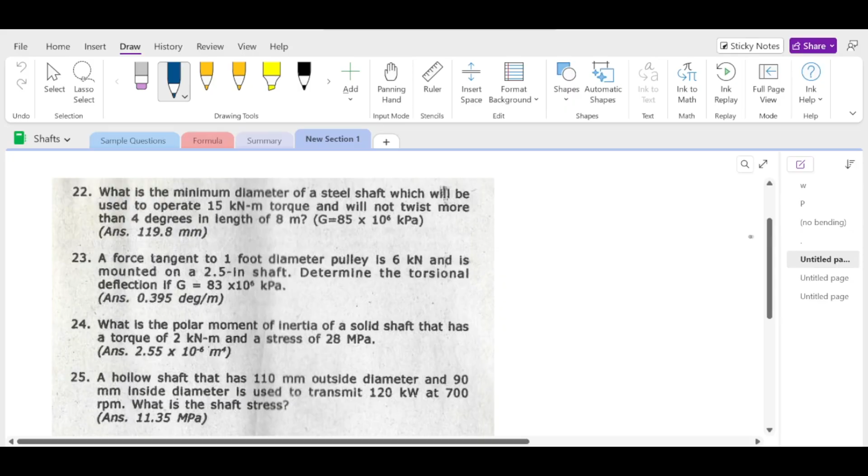So this will be second to the last of the group of problems we're preparing. So let us answer this. Numbers 22 to 27, okay, let's do a marathon here.

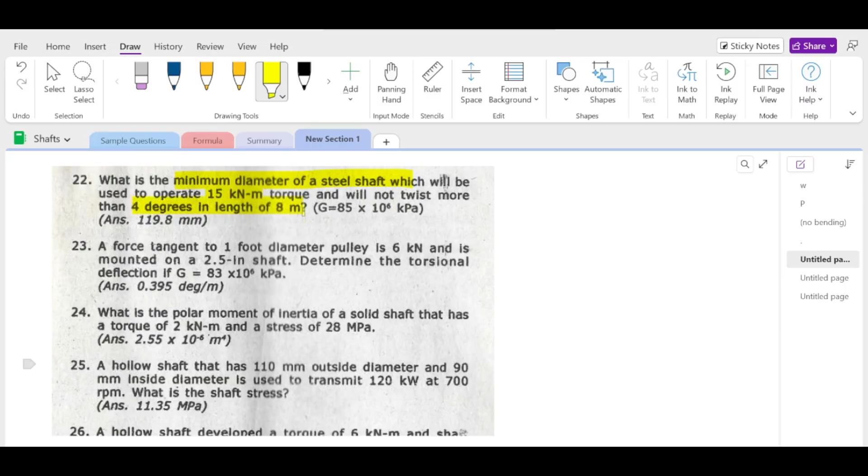For number 22, what is the minimum diameter of a steel shaft which will be used to operate 15 kilonewton meters of torque and will not twist more than 4 degrees in a length of 8 meters? So, basic again.

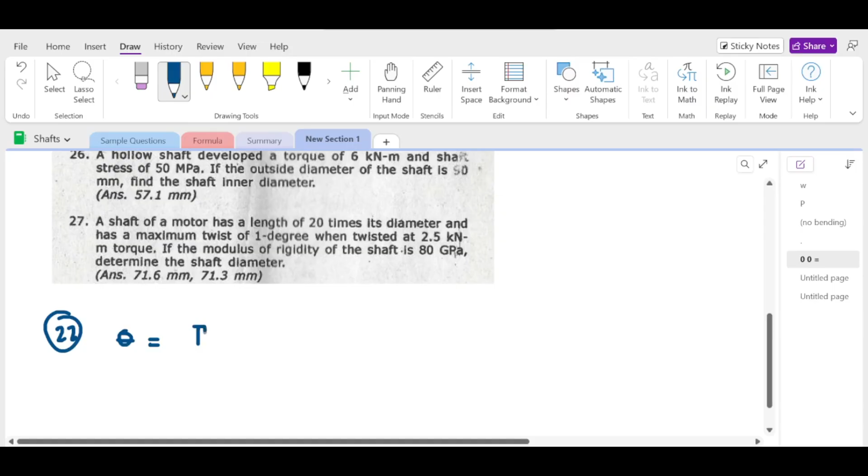Theta, right? So for number 22: Theta equal to T L over J G. Let's reform the equation first.

T L over pi over 32 D to the 4th, times G. You should always solve it like this. Okay, then simplify it further.

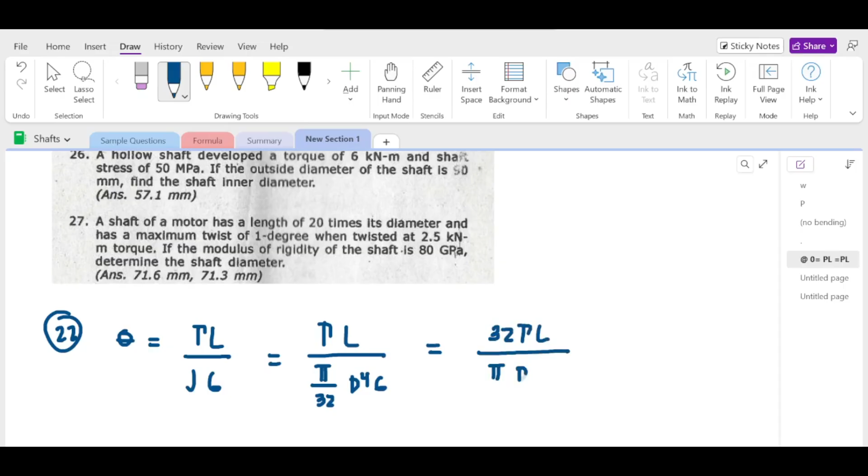Equals 32 T L over pi D to the 4th G. What we're looking for here is the minimum diameter. So diameter to the 4th equal to 32 T L over pi theta G. We can derive this from there.

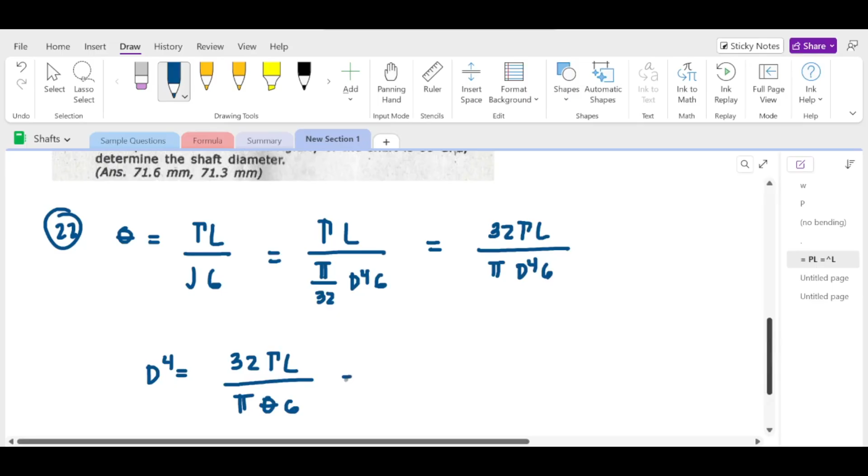So, 32, what will be the torque? 15 kilonewton meter. You have to multiply it with 1,000 squared to make it newton millimeter. So 15 times 1,000 squared. Why, sir? Because it's kilo and meter. Then this will become newton millimeter.

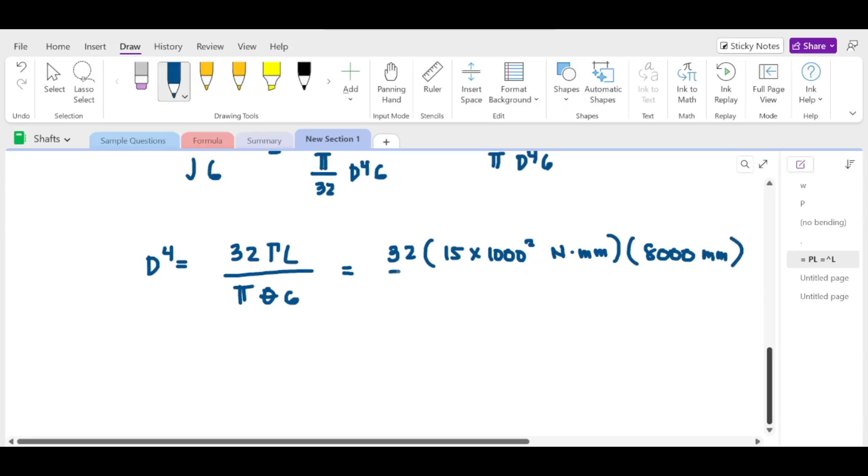So pi, I think that is 4 degrees. 4 degrees times pi over 180 degrees. And then our G is 85. Is that right, 85? Okay, 85 times 10 to the 6th kPa or 85 GPa.

85,000... 85 GPa. So 85,000 MPa or Newton per millimeter squared. Sir, what I need is diameter in millimeters. So 4th root, 4th root of all of it.

Pressing the calculator. Shift, 4th root here. 4 over, inside na tayo. So 32 times 15 times 8. So that's three 1,000's, times 1,000 raised to the 3rd power. Sir, why? I just extracted the 1,000 from the 8,000. Okay, so that is 4...

Shift pi times pi - wait, just two, don't square the pi. Over 180. And then multiply it with 85,000. So the answer is 119.799, or rather 119.8 millimeters. Basic again.

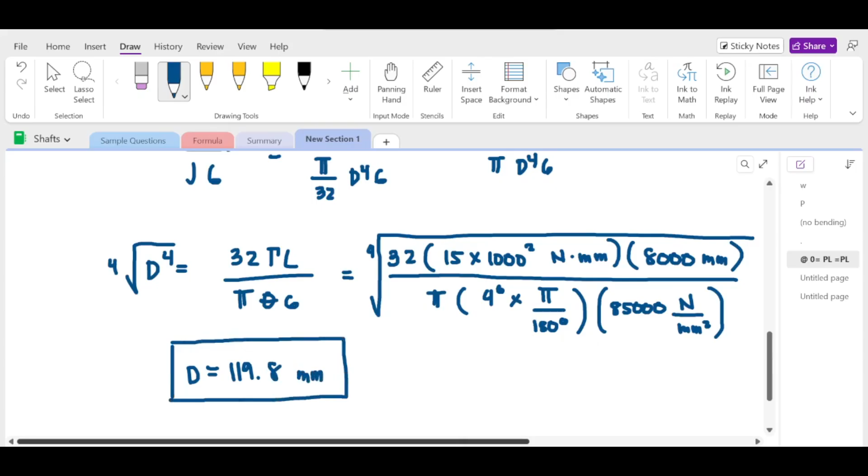Okay, so number 23. A force tangent to a 1 foot diameter pulley is 6 kilonewtons and is mounted on a 2.5-inch shaft. Determine the torsional deflection if...

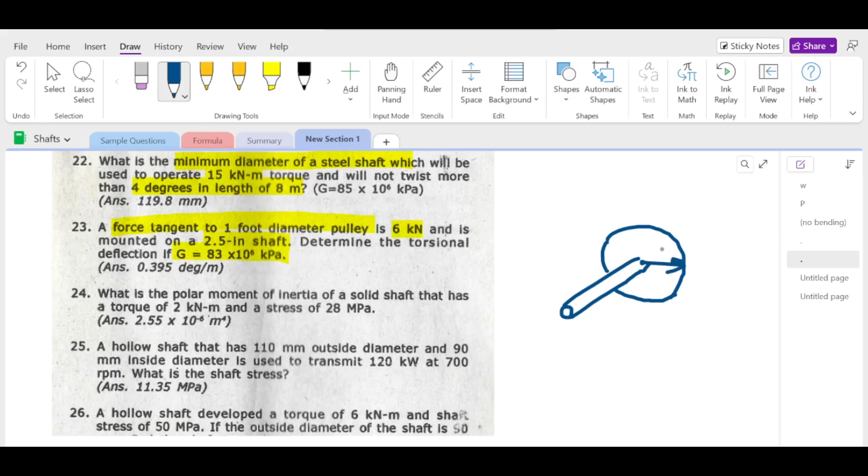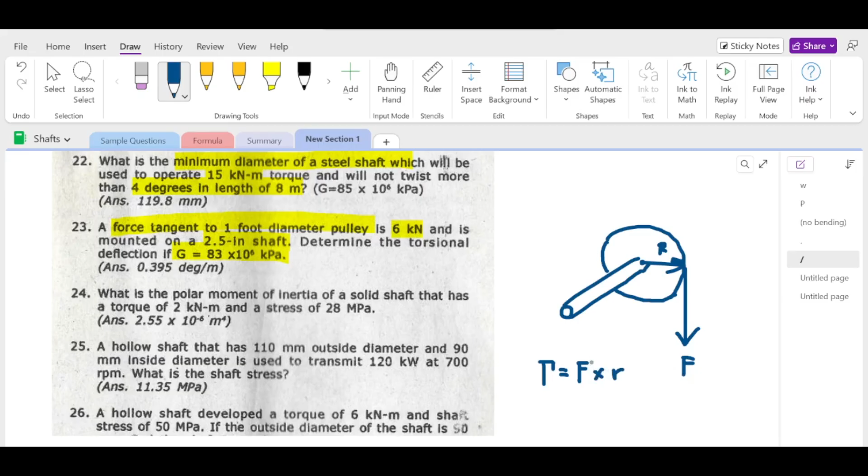This is the radius. The force tangent is this one. This is the force. Force times radius - you call that the torque. The force times radius, that is the torque. What we're looking for here is the torsional deflection.

So the torsional deflection, for number 22 - I mean number 23 now. Theta is equal to T L over J G. Our torque is force times the radius. That's the radius, but no radius was given directly. But our radius, we can use diameter over 2, times the length, over pi over 32 d to the 4th times G.

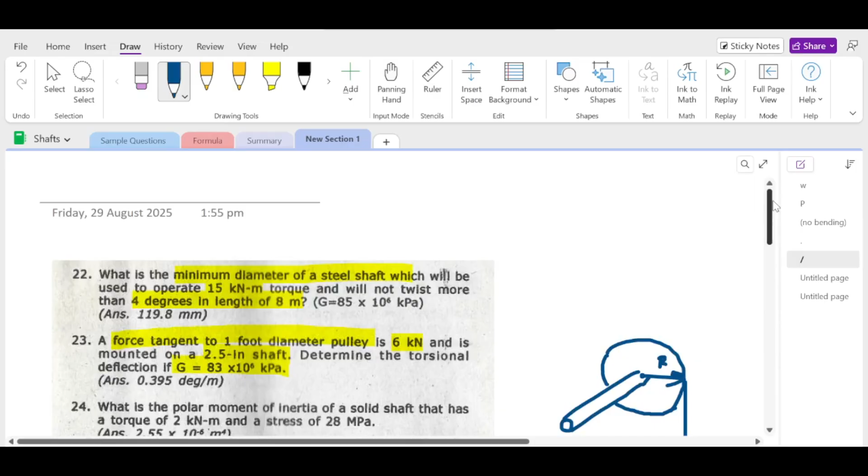So our F is 6 kilonewton, then 1 foot diameter. 6,000 Newton times 1 feet. 1 feet is 12 inches, right? Or 1 foot times 1 meter every 3.28 feet.

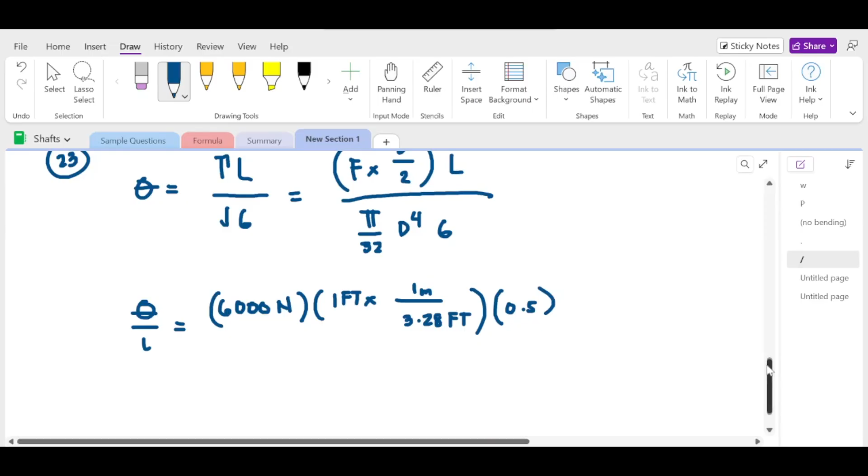2.5 inch - needs to be in millimeter. So 2.5 times 25.4 divide by 1 - now this is millimeter, then to the 4th. And then the G - what is our G here? 83... 83,000 Newton per millimeter squared.

Newton meter - I need it in millimeter. So I multiply this by 1,000 mm per 1 meter. Cancel all same units: Newton, feet, meter, millimeter here.

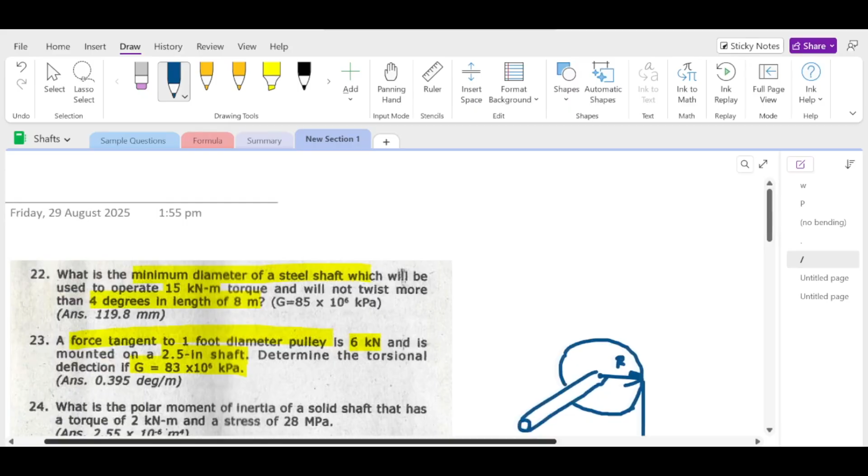0.3955 degree per meter. Basic again. So that is theta over L equal to 0.3955 degrees per meter. Okay, so that is for number 23.

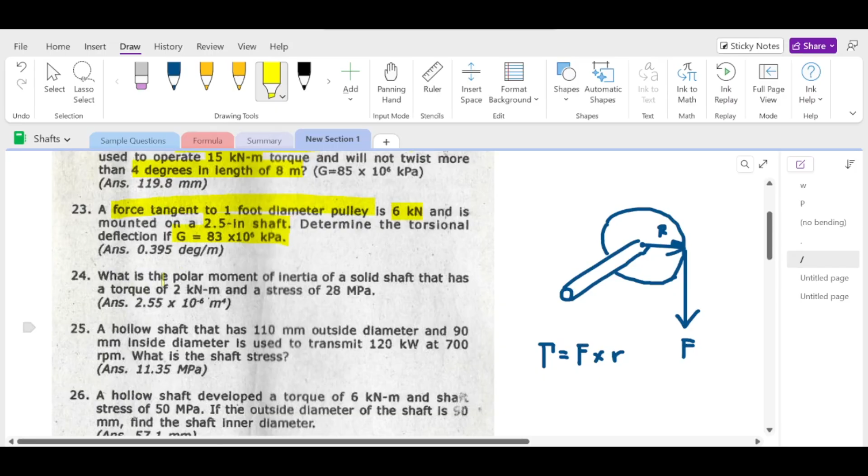Number 24, what is the polar moment? Polar moment of inertia of a solid shaft. You have a torque of 2 kilonewton meter and a stress of 28 megapascal. So I have a stress, then I have a torque. I need to find the diameter. What is asked in number 24 is J, which is pi over 32 d to the fourth. Do I have a diameter? No, they only gave torque and stress.

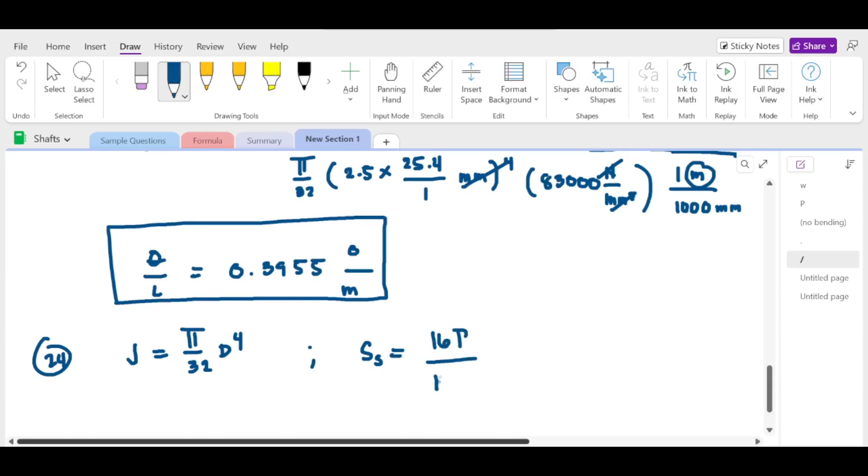So the stress is 16T over pi d cubed. So I need to find d cubed. D will be equal to cube root of 16T over pi ss. So I'll plug this into the value of J. J will be equal to pi over 32, so I can input it directly into the calculator. Our D is the cube root - I didn't simplify it, I'll just plug in the value as 16T over pi ss raised to the fourth power. As is, this is fine.

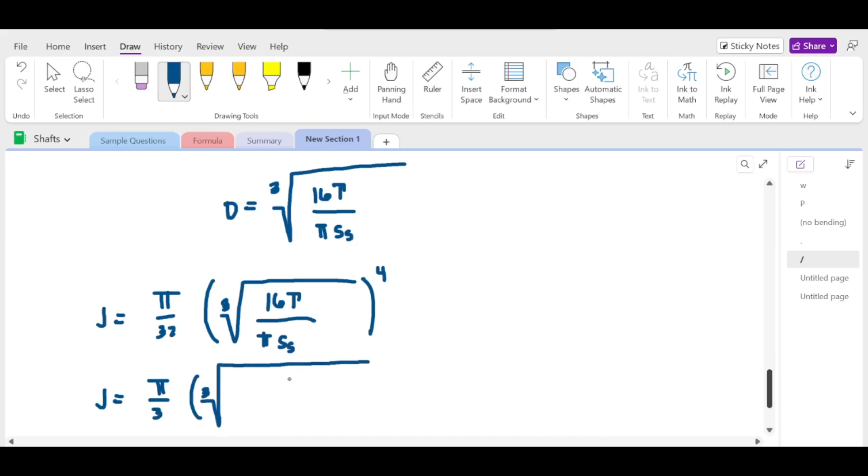So J is equal to pi over 32 times the cube root of 16 times the torque given to you. The torque is 2 kilonewton meter, so 2 times 1,000 squared. The shortcut I'm teaching you is 2 times 1,000 squared because it's in kilo, and it's in meters too. So this becomes Newton millimeter. Divide by pi. I think our SS is 28, yes, 28 MPa, so 28 Newton per millimeter squared.

Then raised to the fourth power. So J, what will be the value of J? Let's press it on the calculator. This is pi over 32. The unit of this will be millimeter to the fourth - yes, that's correct, millimeter to the fourth. So this results in millimeter. So this is shift third root I think.

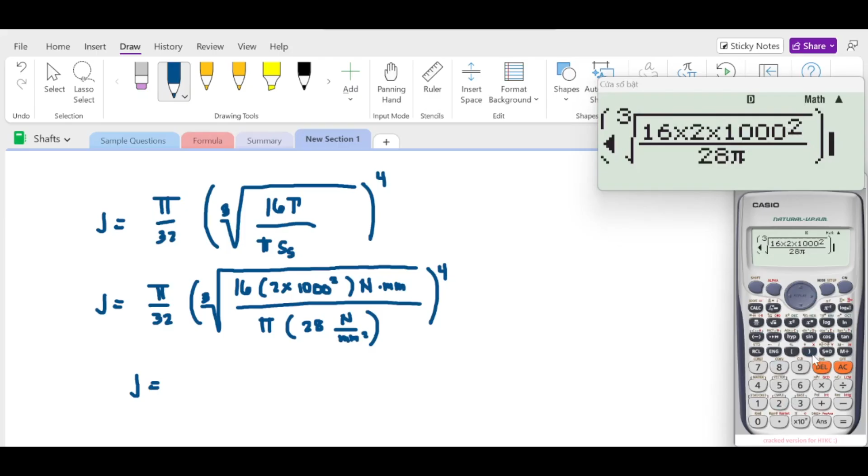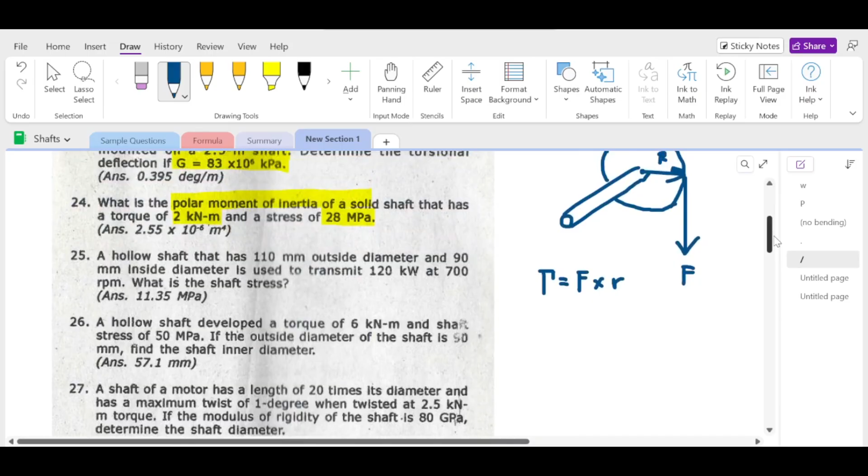So 16 times 2 times 1,000 squared, then 28 pi, then we raise it to the fourth power. So the answer is 2549505.736 millimeter to the fourth. That's correct. The answer is just in scientific notation - 2.55 times 10 raised to the negative 6 meter to the fourth.

It's in scientific notation now. So number 25: A hollow shaft has 110 mm outside diameter and 90 millimeter inside diameter. It is used to transmit 120 kilowatts at 700 RPM. What is the shaft stress? This is basic.

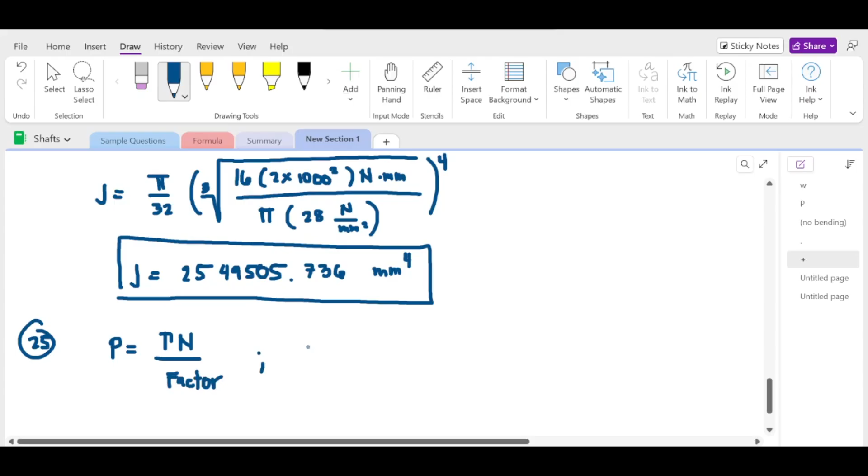Let's list the formulas we'll use. For number 25, the power given to you, that is Tn over factor. So what's asked of you is the stress on the hollow shaft. So the stress on the hollow shaft, that is 16T times diameter outside, divided by pi times diameter to the fourth minus diameter inside to the fourth.

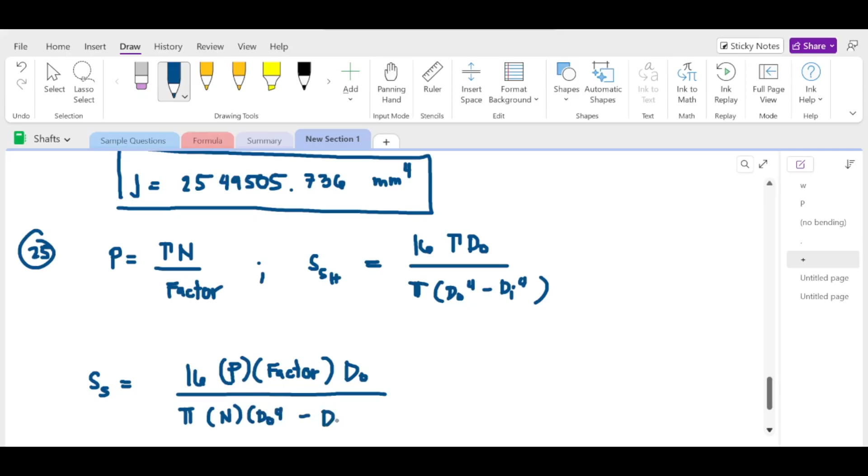Let's plug in the value of torque. So SS is equal to 16. Our torque is power times factor, then multiplied to DO, divided by pi, n, times DO to the fourth minus DI to the fourth. Let's plug in the values. So SS.

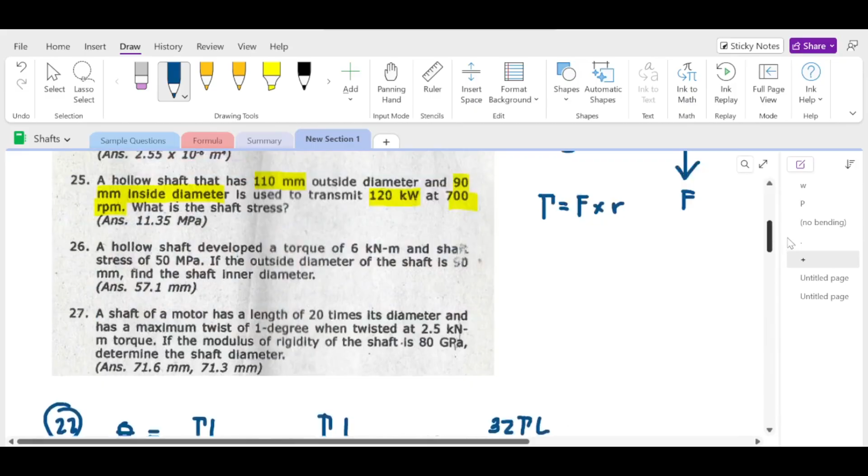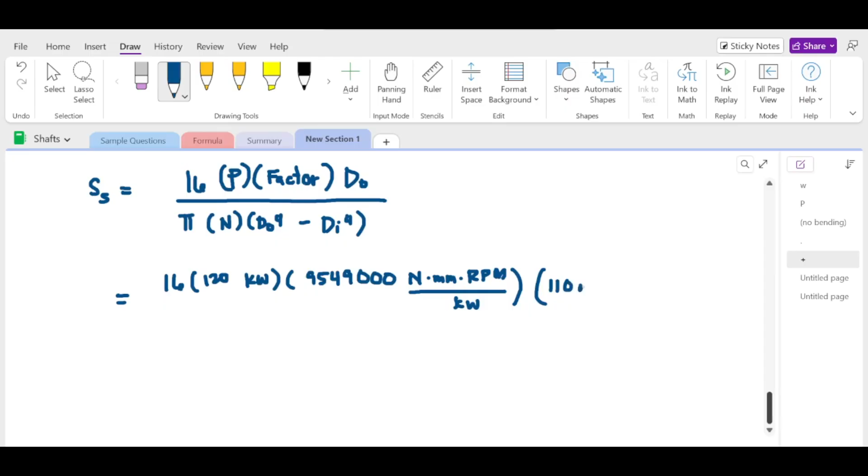So 16, what is the power given? The power is 120 at 700 RPM. 120 kilowatts. The factor is 9,549,000 Newton millimeter RPM per kilowatts. And then outside diameter is 110 mm. 120, how many RPM? 700. So, pi times 700 RPM.

And then inside the bracket: 110 to the fourth minus 90 to the fourth. The unit is mm to the fourth. So for stress, cancel all same units - kilowatt with kilowatt, RPM with RPM, millimeter with millimeter, millimeter squared - squared here. So it becomes Newton per millimeter squared or MPa.

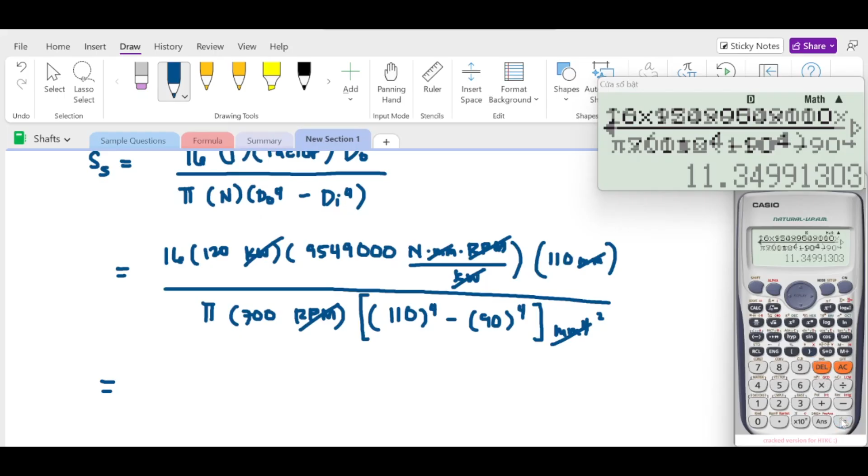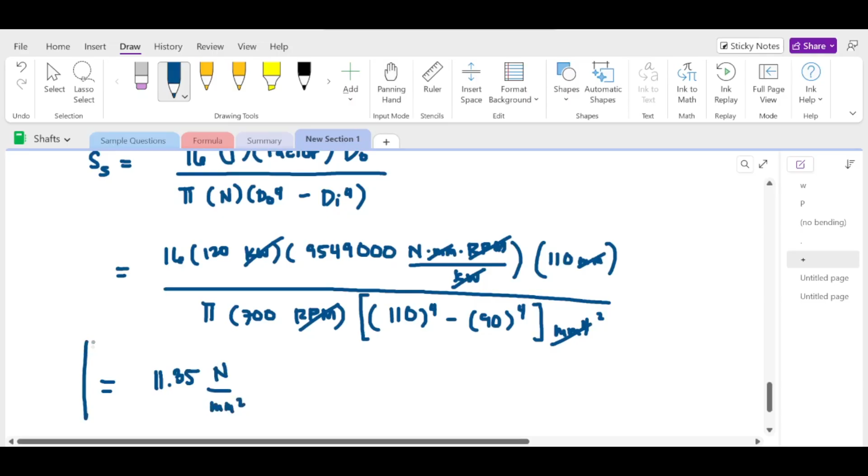So that is 16 times 120 times 9,549,000 times 110, divided by 700 pi times 110 raised to the fourth power minus 90 raised to the fourth power. So the answer is 11.35 MPa, Newton per millimeter squared. Let's check if that is correct for number 25.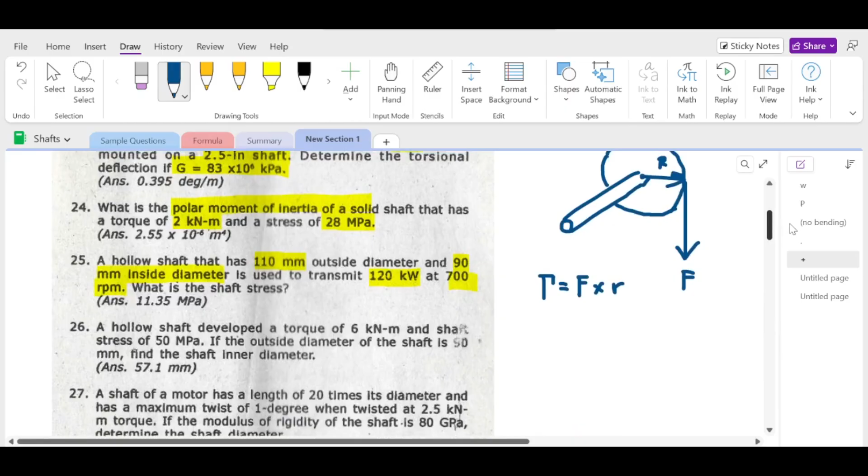Problem 26: A hollow shaft develops a torque of 6 kN-m and a shaft stress of 50 MPa. If the outside diameter of the shaft is... I don't know if this is 90, find the shaft inner diameter.

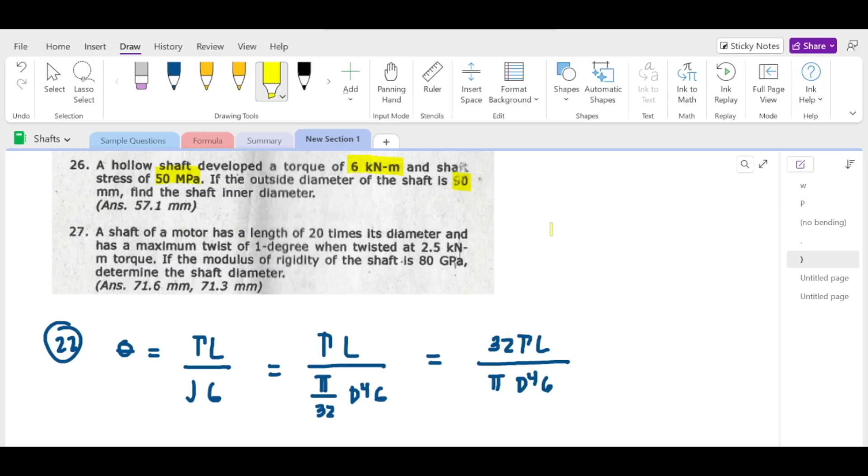I think this is 90. Let's just assume it's 90 - it's unclear. Maybe the inside is bigger. Let's assume this is 90. I'm not sure if this is 90 or 70 - it could be 70, 90, or 80. But let's just look at it. What we're solving for here is the inner diameter.

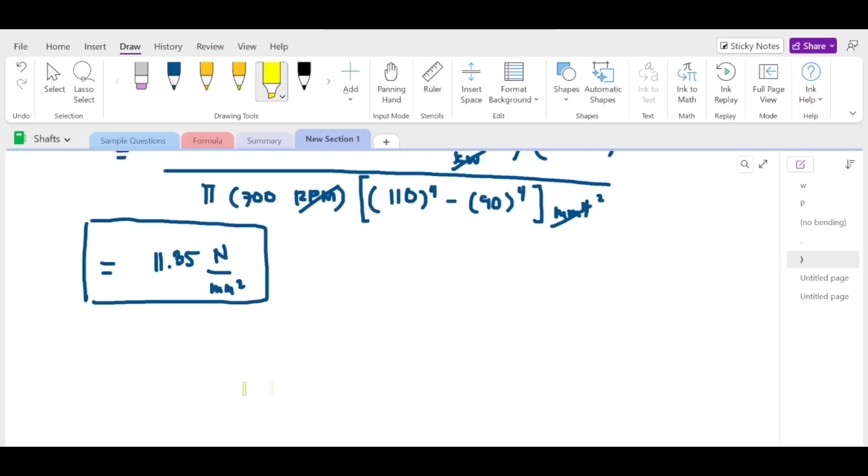Let's repeat the process. What's given to you is torque, for number 26. So the stress formula for a hollow shaft is SS = 16T·DO / [pi(DO^4 - DI^4)].

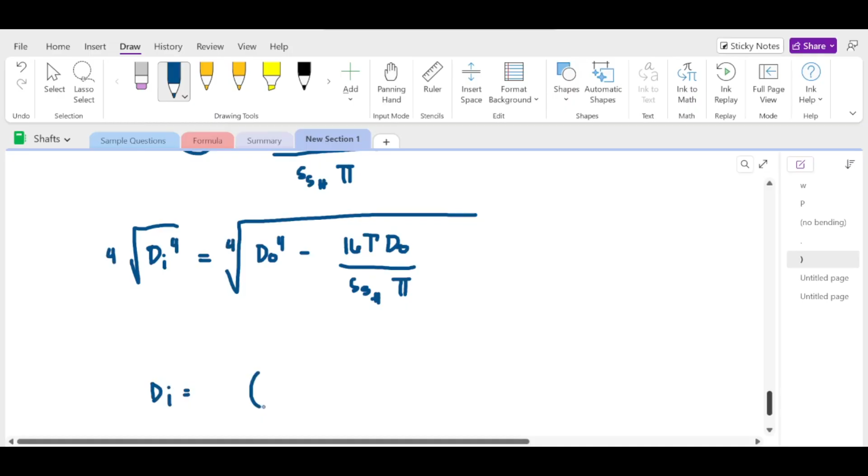Let's assume 90 for the outside diameter, with 6 kN·meter torque and 50 MPa stress. So 90 mm to the fourth minus 16 times 6 kN·meter, so 6 times 1,000 squared Newton-millimeter.

That's standard procedure already. Times outside diameter of 90 mm. Divide by stress - what is the stress? 50 MPa, so 50 Newton per millimeter squared, times pi.

So take the fourth root of this whole thing. Let's check if we've taken the fourth root correctly here. Cancel all same units: Newton combines, millimeter squared, millimeter cubed times millimeter, that's millimeter to the fourth power. And then the fourth root of millimeter to the fourth is millimeter.

Okay, so the answer is - these questions are basic. That is 90 raised to the fourth power minus 16 times 6 times 1,000 squared, times 90, divide by

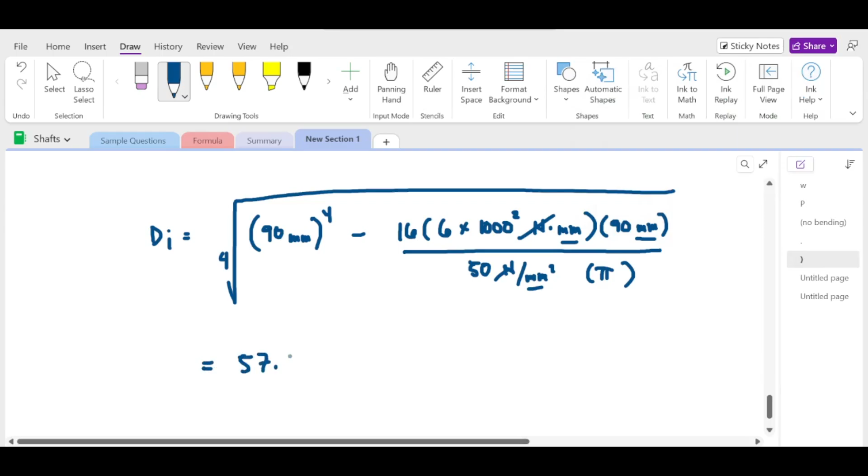50 pi. So the answer is 57.07 mm. This is very basic - the questions here are very basic.

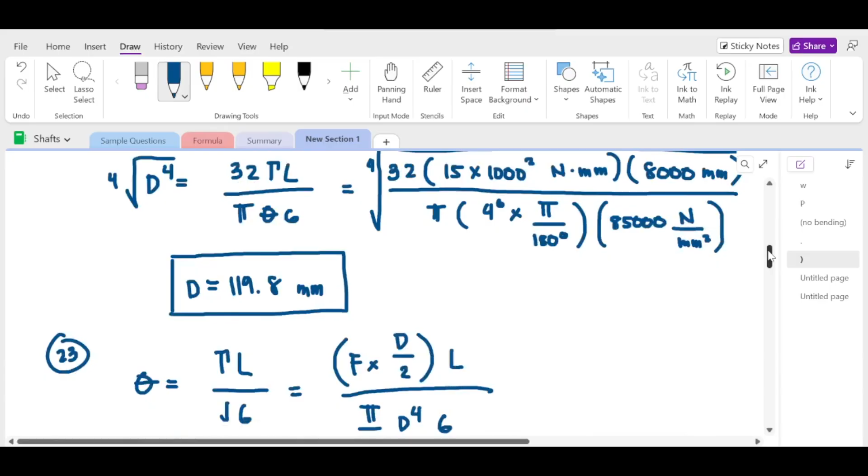For shafting, number 26. And for the last problem, number 27: a shaft has a length of 20 times its diameter. So it says the length is 20 times the diameter. What else? And has a maximum twist of 1 degree when twisted at 2.5 kN-meter torque. If the modulus of rigidity is 80 GPa - basic - find the shaft diameter.

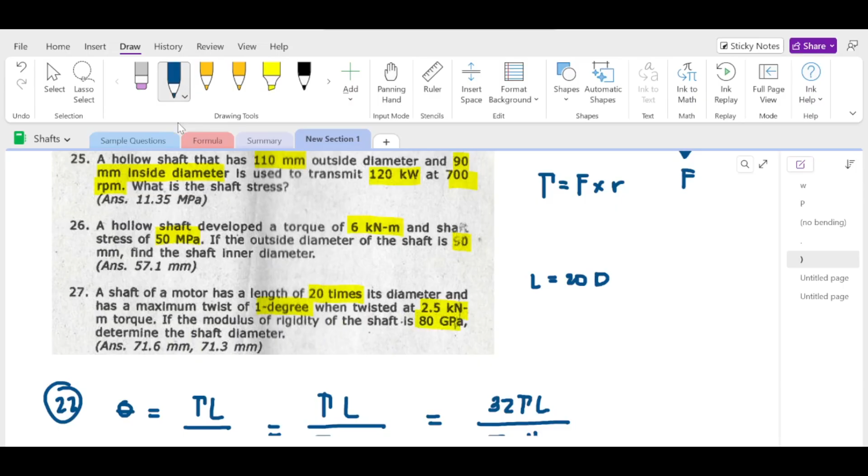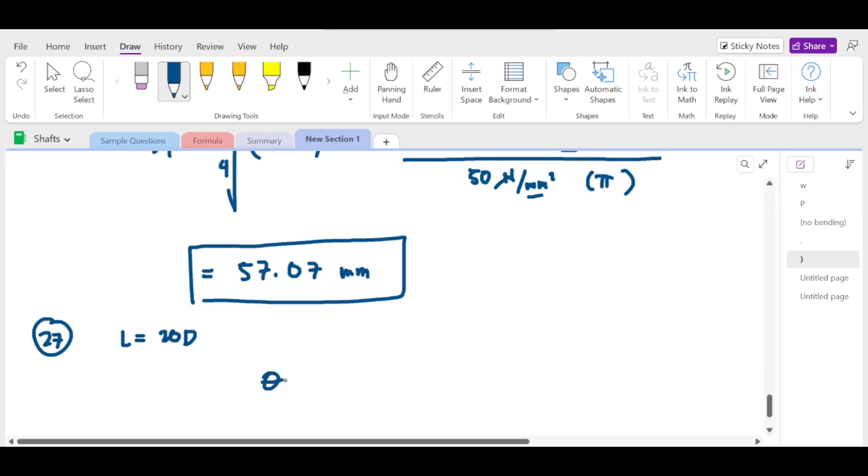For our answer, number 27, the condition is that the length is 20 times the diameter. So theta equals TL over JG. TL over JG - that's TL over pi over 32.

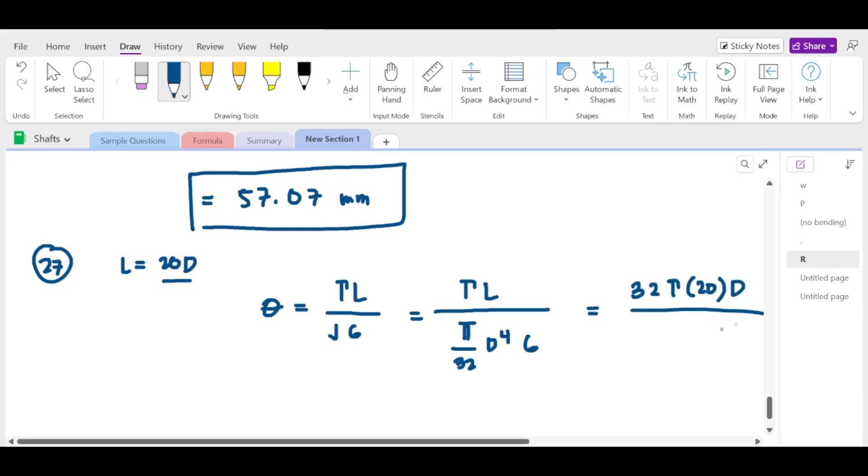Let's organize the writing so it's easier to understand. So pi over 32, d to the fourth, G. Simplify it further: 32T, my L is 20d, times 20 and d over pi, d to the fourth, G.

The D's will cancel, right? It becomes cubed. So theta will equal 32 times 20 times the torque, divided by pi d cubed times G.

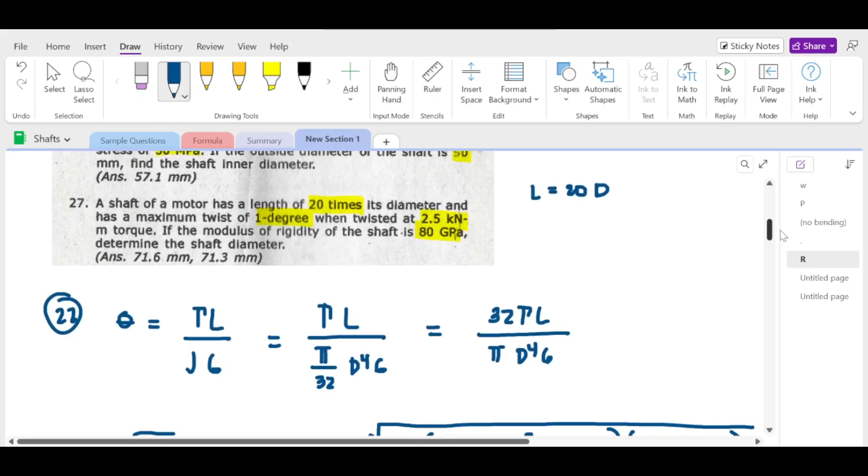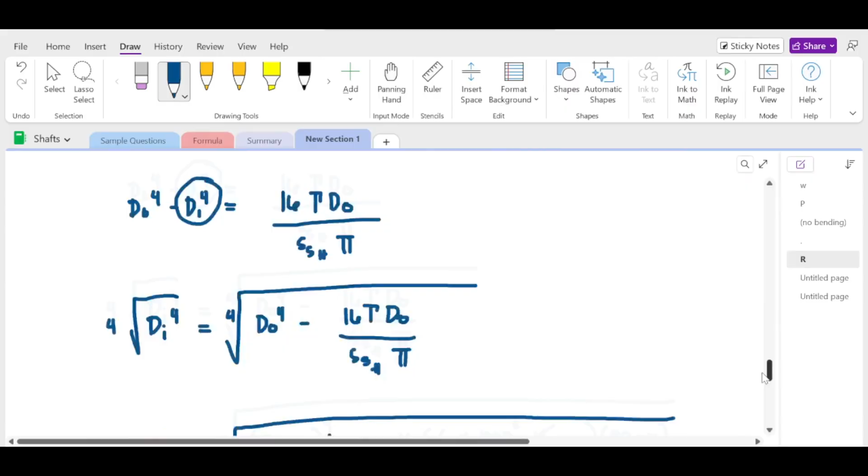D cubed equals 32 times 20 times the torque. The torque is 2... 2.5 kilonewton-meter, so 2.5 times 1,000 squared Newton-millimeter.

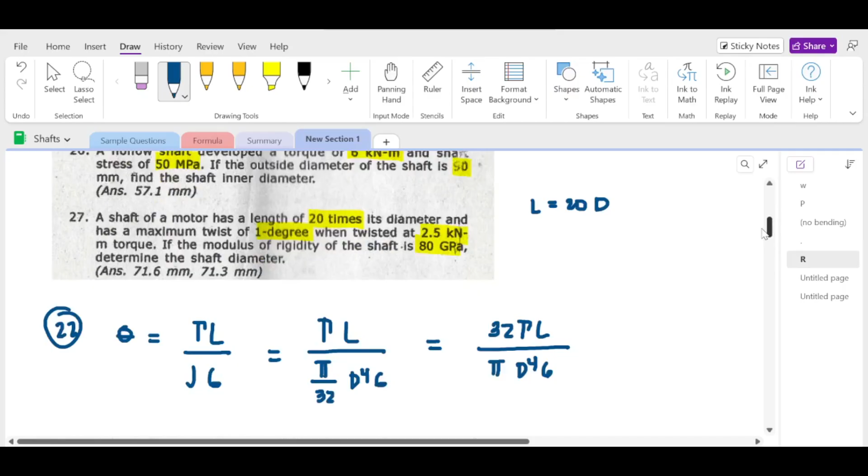The deflection is pi times 1 degree times pi over 180 degrees. And G is - let me make sure I'm not mistaken - 90 or 80... yes, 80. 80 Newton per millimeter squared.

So cancel all same units - Newton cancels, what remains is millimeter cubed. Millimeter squared, add the powers together. So cube root, and then take the cube root of the whole thing.

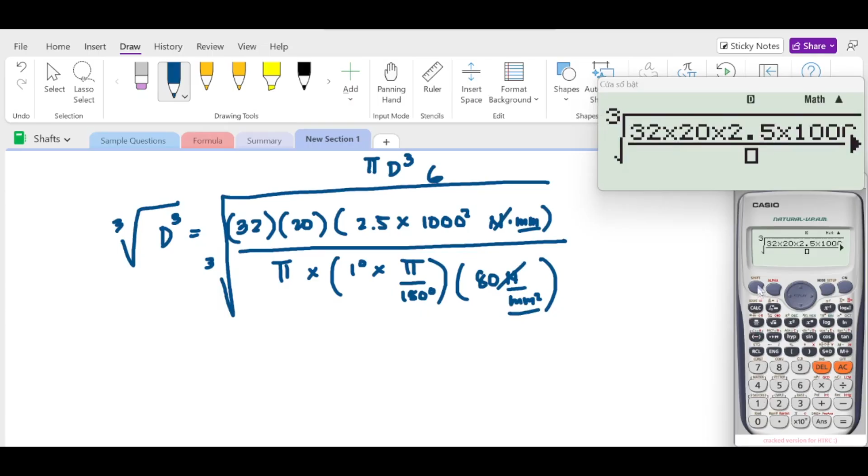So the answer is... let's see: 32 times 20 times 2.5 times 1,000 squared, divide by pi times - shift - pi divide by 180, times 80. So the answer is...

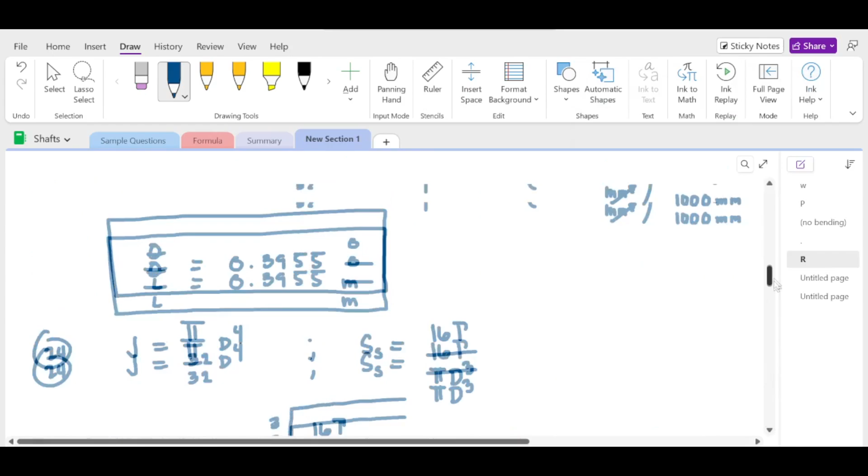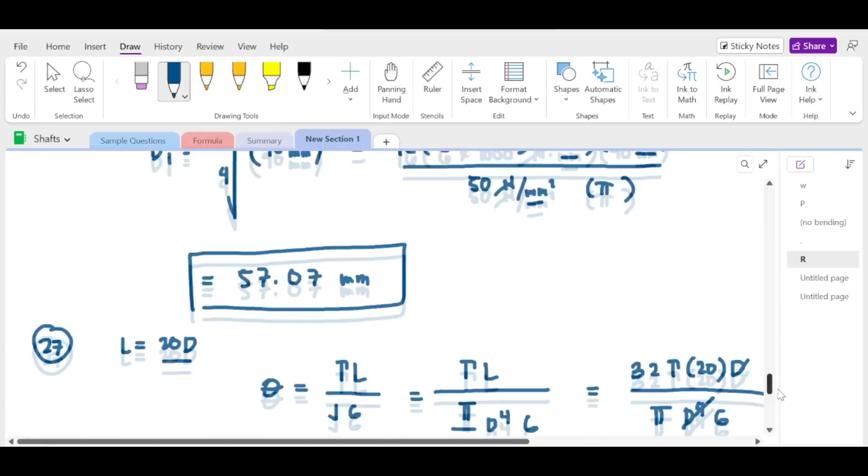So D to the fourth, 20D, D cubed - that's correct. Then G, torque - Newton, millimeter - it's in meters, so 1,000 for kilonewton, then 1,000 millimeter, 32 times 20, pi, 80. That's exactly it. It became like that - where did I go wrong?

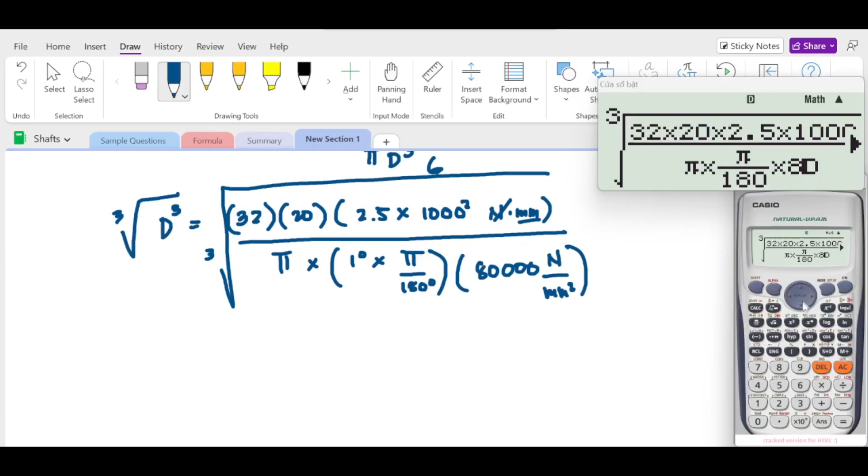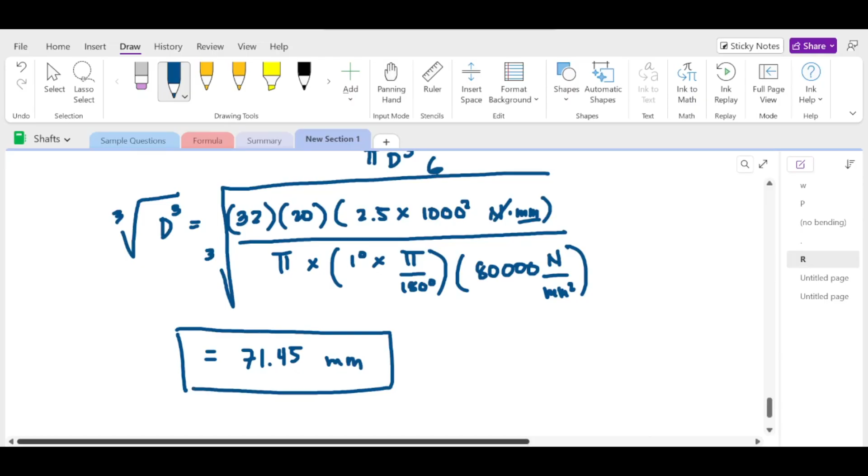So the answer is 71.45 mm. So this is, again, basic - that's the last of the two problems.